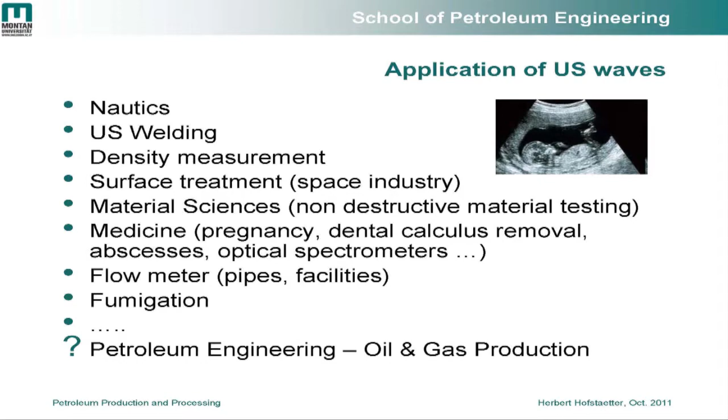But generally speaking, what is the application of ultrasonic waves nowadays in order to improve oil and gas production? What can we do in order to get more out of the ground in a more effective way, and in a more cost-effective way too?

Let me start with a few definitions and basics on ultrasonic waves we need to understand before we go into the details of worldwide applications. If we're talking about ultrasonic waves, we mean all those waves above 16,000 hertz, so a human being cannot hear this sort of wave. I'm not saying that nature doesn't hear more than 16,000 hertz.

We also need to understand, if we want to transport ultrasonic waves, we need incompressible media. For instance, in a gaseous atmosphere, we wouldn't be able to transport these ultrasonic waves over a long distance. So we need a liquid environment, since liquids, for instance water, are almost incompressible. I'm not saying water is not compressible at all—this is not true, water is compressible, and this has a significant impact in reservoir engineering. But for our application, we can assume, and we can live with this assumption, that water is a sort of incompressible.

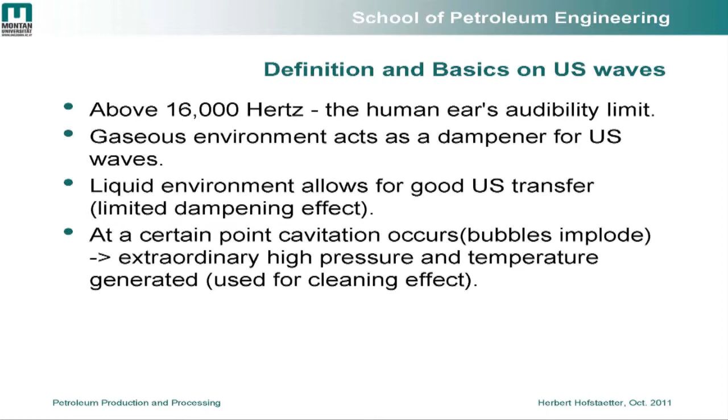Most important for this phenomenon is that we have to understand that at a certain point cavitation occurs. This means if we intensively apply ultrasonic waves, we generate some bubbles which may implode, and therefore extraordinary high pressure and temperature is generated at that time. This phenomenon is basically used in our industry to apply ultrasonic waves in an effective way.

Now, what do we mean by cavitation, which is the driving motor for the ultrasonic wave application? We mean by cavitation the formation and immediate implosion of cavities in a liquid. This means we are forming small bubbles, they implode and then finally generate excessive energy, which is useful in our business. It usually occurs when a liquid is subjected to rapid changes of pressure that cause the formation of cavities where the pressure is relatively low.

In other words, there is an application given in every borehole worldwide, whatever the depth of the borehole is, and this phenomenon we need to apply at a later stage—we will see what the benefit out of that is. The cavitation bubbles implode with force that can be generated which is 1,000 times higher than the primary force exerted by the ultrasonic field and emitted into the media.

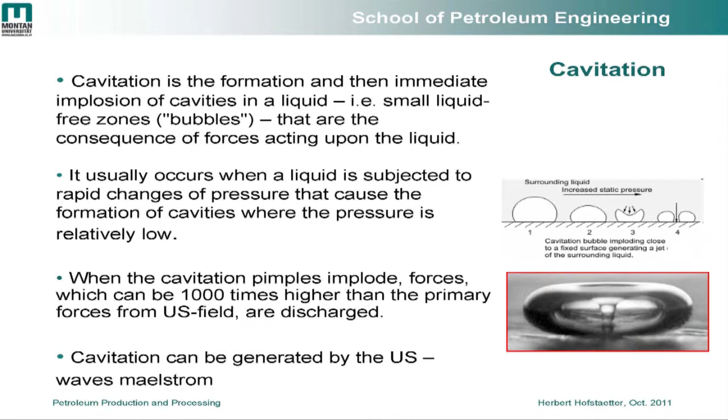On the right hand side, we see the formation of this bubble, right at the stage of implosion, just before it's going to implode. Most important for us is that we need to generate the cavitation, which is generated or might be generated by ultrasonic waves—a maelstrom—and that's what we're going to use. The focus is that we apply just limited energy by the ultrasonic field, and we generate 1,000 times larger force, which we can then use for different types of purposes.

The question that arises now is how to generate basically ultrasonic waves.

To dissipate electromechanical oscillation, a force is usually required which originates from the so-called reverse piezoelectric effect. What is the piezoelectric effect all about? Reducing it to the basics, all we are doing is forcing crystals in order to generate electricity. If we are forcing crystals at the surface and the platelets together, then we can generate electricity, but this effect can be reversed too.

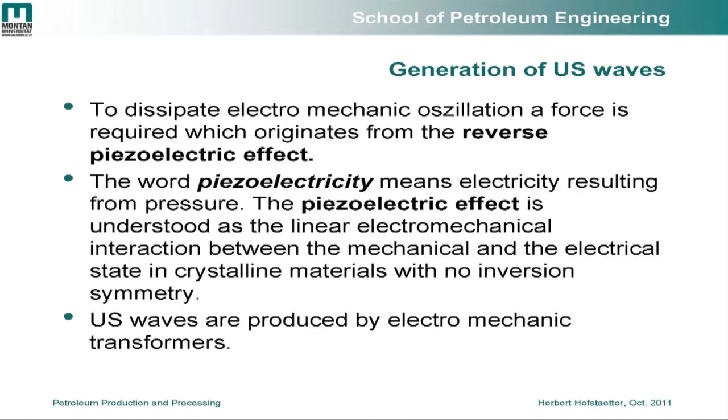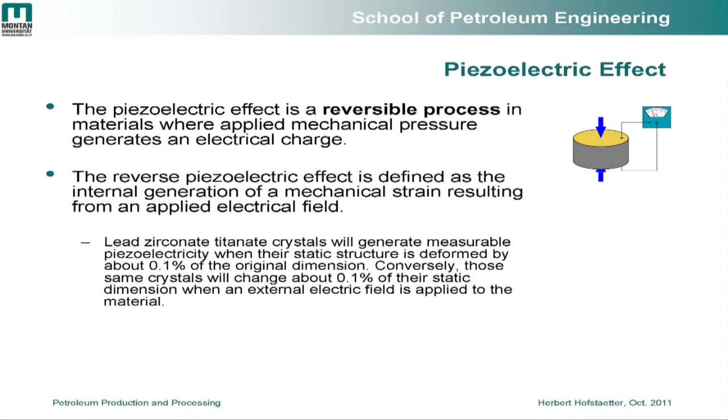This means if we apply electricity to the quartzite, for instance, then we can generate forces, so it's reversible as often as you want. The piezoelectric effect is not new at all, well known for many decades. It's most important that this process is reversible in materials where we apply mechanical pressure, shown here on the right-hand side. If we apply force at this sample of quartzite, electricity is produced, and the other way around, if we apply electricity, we are able to make this quartzite move at a certain frequency. This is the phenomenon we use in the industry.

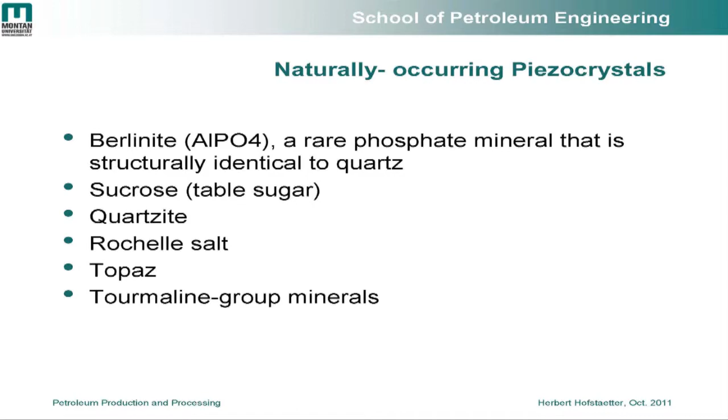How to use now these crystals? There are several ways well known throughout the entire industry. There are naturally occurring piezo crystals, and the most famous one is quartzite, well known because of its excellent and outstanding properties, showing up at whatever temperature or pressure might be in the surrounding environment. There are several other types of crystals known in the industry. Some rare elements are involved, and most are expensive too, which is why quartzite actually has the most application worldwide. But besides the naturally occurring crystals, we also know man-made piezo crystals and ceramics, a special type of crystal.

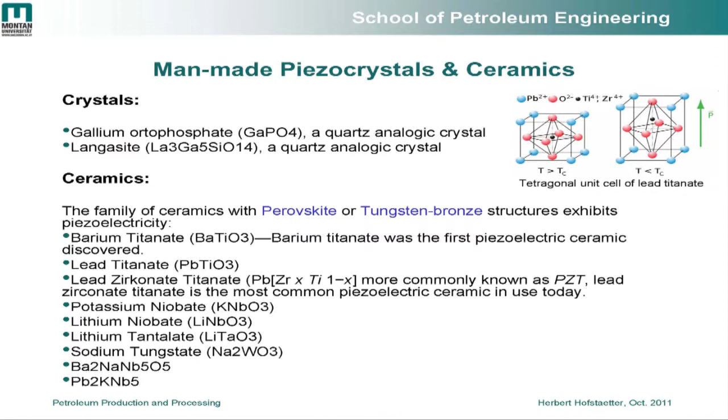We see here these different types, and I'm not going to plague you now with all these chemical formulas and different types of crystals and ceramic types. Anyway, they are most important nowadays because they have unique behavior. They show up with unique behavior, and are sometimes way better than the conventional natural quartzite, as we discussed before.

Some of the crystals also contain lead, and lead is questionable nowadays because of well-known environmental reasons. So the industry actually shows a strong tendency to keep off from this lead-containing piezo ceramics and switch over to other alternatives. Alternatives are given, they are already in place. Being very honest, some of these solutions are more expensive than the conventional lead piezo ceramics, but it is high priority nowadays to apply this new technology in our industry.

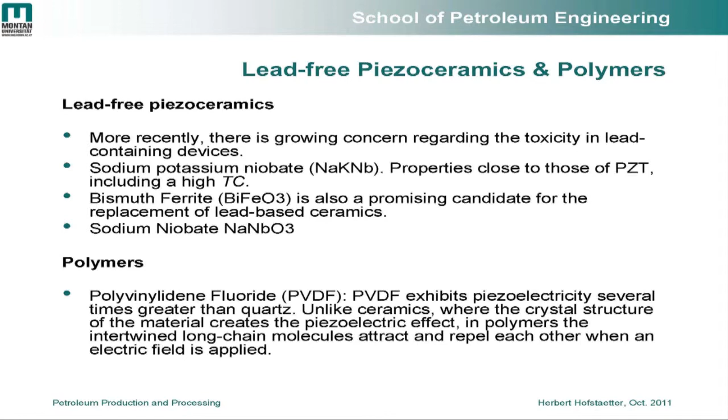Finally, we also know that polymers are ideal to show this piezo effect. But even though we are at a much earlier stage of our research here, we know there is an application, but there is still room left for further research into what's to be done in the future. I'm seeing lots of young people around here, and this will be maybe your future, to work on this subject and find out what's best of all for the solutions in our industry.

Now let me step further. What are the key issues in our oil and gas business, and where can we finally apply these ultrasonic waves and make use of this phenomenon?

One of them is the degassing effect by ultrasonic waves. We all know, just think about a bottle of Coke, or a bottle of beer if you want, that gases are soluble in liquids. Gases are soluble in water, and gases are soluble in hydrocarbons, in oil for instance. Depending on the pressure and temperature boundary conditions, we can dissolve more or less. The higher the pressure, usually the higher the solubility. The higher the temperature, generally the lower the solubility. This applies for oil as well as for gas.

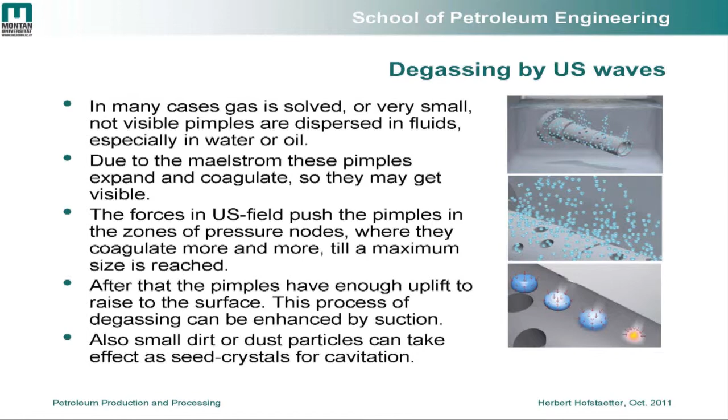Now back to the Coke sample. Put a bottle of Coke in the sunshine and open it, and you are going to have a hard time. If you take the bottle of Coke out from the fridge and open it, then nothing is going to happen, or almost nothing.

The point is that solubility for gas decreases with higher temperature. This is the reason why you run into trouble if you open a bottle that's been in the sunshine, but you don't have a problem at all if you take it out of a low temperature environment.

In the oil industry, we make use of that, and we need to get these gas bubbles out of oil, even at low temperatures. This means we don't need to apply extra energy to increase the temperature level.

We also can get the gas out of liquid media, from liquids at lower temperature, by the application of sonic waves. Even though the bubbles are not visible at first since they are finely dispersed in the fluids, water or oil, if we use the effect of the maelstrom, these bubbles expand and coagulate into larger ones. Finally they implode, as discussed before, and can be recovered from the liquid phase. A very non-tricky operation, low-cost, at a low energy level, so highly attractive for our industry.

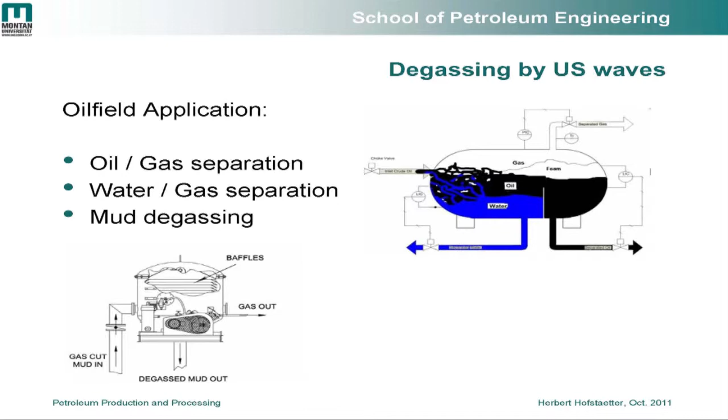What engineers and operators do at the surface is remove the gas from the drilling fluid, from the drilling mud. This is rather tricky since drilling fluids have their own parameters which don't always allow removing gas at any pressure and temperature condition. Again, there is an application for ultrasonic waves to get the gas out of the liquids at a low energy level.

Another problem in our industry is that crude oil in many areas of the world comes along with paraffins and asphaltenes. These have a strong tendency to be deposited in the pipes, and because of this deposition, the inside diameter of the pipes is reduced.

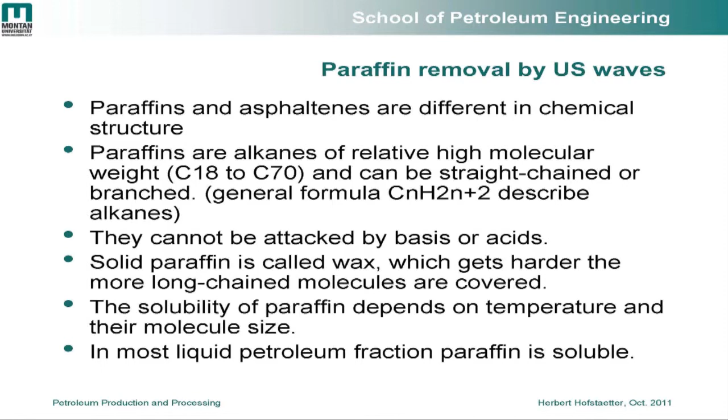So we create a so-called flow restriction, hindering the natural flow all the way from downhole back to the surface. This means lower production, which is definitely unwanted in our operation. We want to produce as much as we can, being very honest with you. But precipitation of paraffin and asphaltene hinders this process.

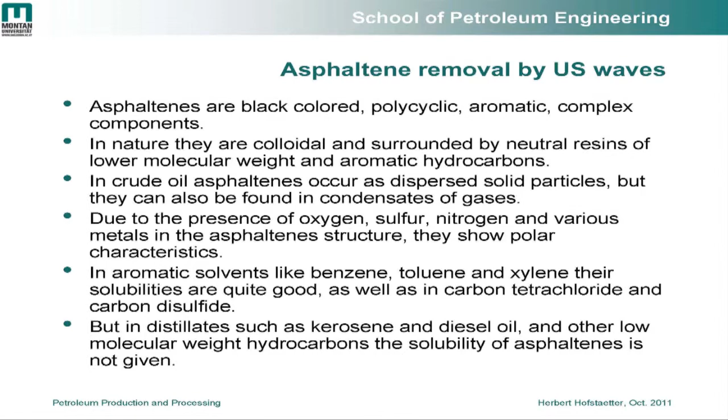We know we might remove paraffins and asphaltenes chemically, but you first have to get access to this sort of deposition. There's no use of chemicals required in this particular case, and we have demonstrated in the lab and in the field that the application of sonic waves can reduce the precipitation of paraffins and asphaltenes.

How does the removal process happen? Now, if this is our emitter, our ultrasonic emitter, we are sending waves directly into the reservoir.

So we are lowering our ultrasonic tool downhole directly into the borehole, and at a certain point we stop, and then we start to emit this 30,000 hertz frequency into the reservoir rock.

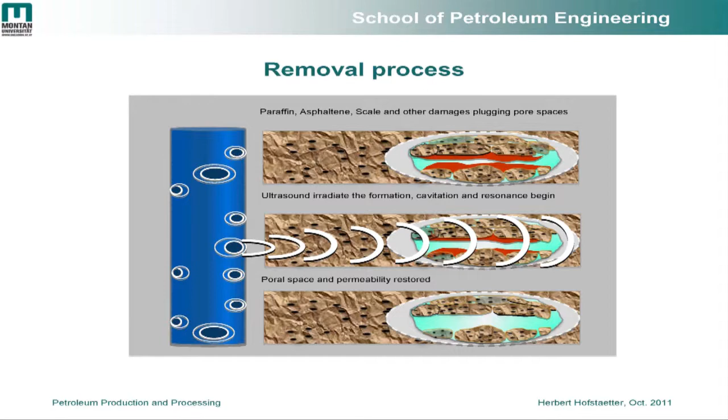If we enlarge this part of our reservoir sample, we see the deposition here at that point, which hinders the flow of oil and gas. It could be debris or something else. Emitting these ultrasonic waves finally cleans these pore throats, these tiny pore channels, allowing more inflow into the wellbore. More inflow into the wellbore means higher production, higher productivity of the entire process.

What are the problems with wax precipitation? I already mentioned that the inside diameter is reduced. This is a field sample I brought for you here, and you can see that at the end of the day, finally, the entire volume of the diameter is plugged, and there is no more room left for any flow.

So these pipes are definitely fully plugged. This ends up, first of all, in a lower production rate, and finally in no more income, which is not what we want to achieve in our business. Because of these precipitations, we also get higher friction, which means we need more energy to produce the fluid. This means more energy consumption, higher costs overall. And finally, the surface facilities get plugged, and the pipelines too.

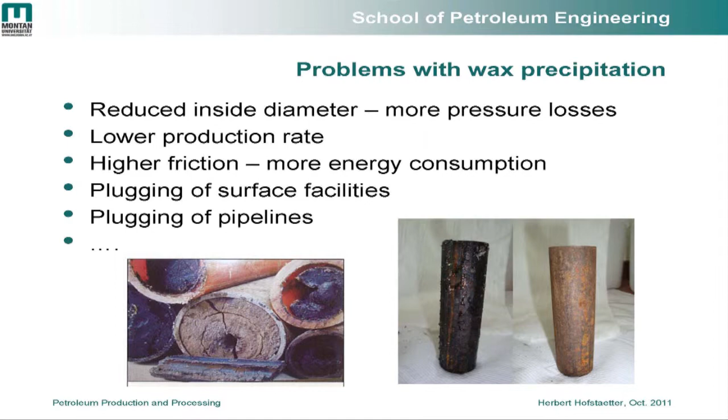On the right-hand side, I brought a sample for you, what we did in the lab. Here on this left-hand side, we have a piece of a sucker rod string, which we need to pump the oil out of the ground. This one is fully adhering and contaminated by paraffins. After treating this sample in the lab with ultrasonic waves, we finally came up with the blank surface of the sucker rod item we tested.

Here is the impact of the pressure losses by wax deposition. On the vertical axis, the y-axis, I'm showing the depth in thousands of feet, and here on the x-axis, I show the pressure loss in 100 psi. I start on the right-hand side with a 1-inch diameter of a tubing size, and on the left-hand side we get 3 inches of a tubing size.

Now let's assume we are starting to produce a new well, and we have the full diameter of 3 inches, so we start here at that point with this sort of pressure loss. Let's assume this is something like 1100 psi we are going to lose on the way up back to the surface in a depth of something like 10,000 feet, 3,000 meters or so.

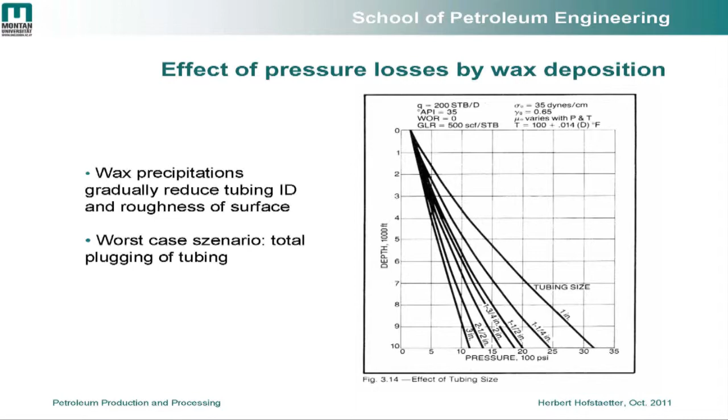If now the tubing is gradually reduced in its inside diameter because of these precipitations of paraffins and asphaltenes, we end up at a smaller inside diameter of 1 inch only, and see how much the pressure loss is now. It's more than 3,000 psi, threefold as much as in the clean tubing.

This means we are losing a hell of pressure on the way up to the surface. Way more energy is consumed, and maybe the wellbore is not free-flowing at all, so we have to implement artificial lift systems. As I mentioned before, the worst case scenario could be that the inside diameter is so small that it's fully plugged and even no flow is going to happen. This is a nightmare for every operator.

Just before I left from Europe to Brazil, I talked to my colleagues in the North Sea. They are in the situation now, in a giant oil field actually, having the problem of these precipitations. It's a shell-operated field, and they are having no production at all from some wellbores because of exactly this phenomenon.

How was our setup in the lab at our university? As mentioned before, I'm cooperating with this Swiss company, Progress Ultrasonics, and they have supplied all these test devices. You see here the source for the ultrasonic generator, and we are emitting via this type of sonotrode, vertically downhole into this chamber.

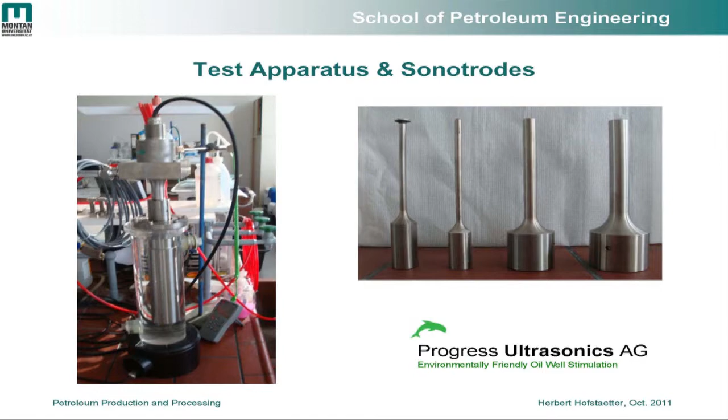The trick thereby is that we have to identify the correct frequency, the correct wavelength, and how to emit optimally onto the object we want to get our hands on. Another trick is the construction, the geometry of the sonotrodes, and which material we implement. These are conventional high alloy steel sonotrodes, but in the future we are going to use ceramic sonotrodes as well. I'm working with my colleagues from the Institute of Ceramics on this new type of sonotrode for the next generation.

This is a vertical inflow performance presentation showing how we can improve the productivity of our wellbore. You see the productivity of the wellbore on the x-axis, and we see the pressure on the ordinate. The green line represents the inflow performance, meaning the lower the wellbore flowing pressure, the higher the productivity.

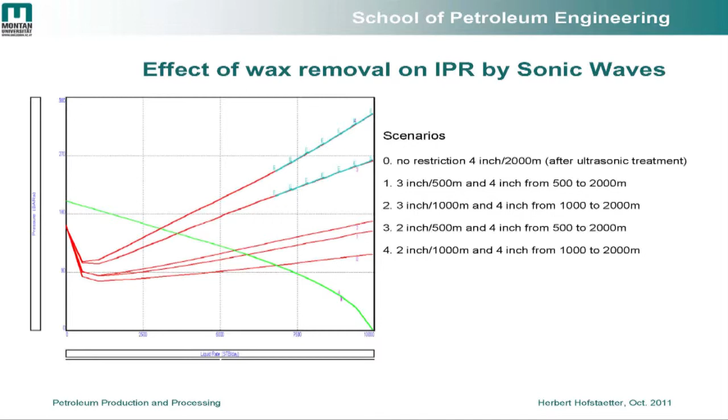This is now the simulation of the large diameter without any precipitation, and this would be the representative line with precipitations and with restricted inside diameters. You see how much productivity we lose if we reduce the inside diameter. So there is a substantial impact on our overall productivity of the wellbores, predominantly on oil production.

I emphasize predominantly on oil production because we also know some gases or higher hydrocarbons which come along with paraffin and asphaltenes, causing the same problem. What are the reasons for other precipitations? We are also talking about precipitations of calcium carbonate, and this hurts in exactly the same way. They're even worse, because we are having precipitations which are not soluble. Calcium carbonate can be removed by applying hydrochloric acid, but barium and strontium sulfate precipitations cannot be dissolved chemically. They have to be removed in another way.

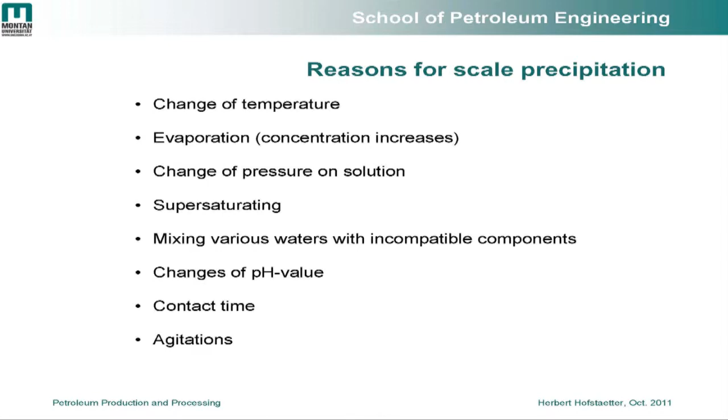One of the reasons might be the change of temperature. Pressure and temperature change on a regular basis during the lifetime of a field, so we cannot change this. We have to live with that.

Another famous point is supersaturation, oversaturated media, which finally leads to the precipitation of salts. Another important point is the contact time. This means the more we are producing, the longer the time elapsed in our production period, the higher the chance of precipitations.

Now, what are further problems with scaling? It is not only the reduction of the inside diameter of our tubing string, it is also the problem that precipitations in the near wellbore zone are well known to cause further pressure drops. The higher the pressure loss in the near wellbore zone, the lower the production rate will be. We call this the so-called skin factor, and we can to a certain extent remove the skin factor by applying acids to dissolve these precipitations, but this is not generally given.

One of these options would be an interference between the application of ultrasonic waves and hydrochloric acid, HCl, for instance. We don't know at the moment, and we have to be honest to ourselves - we have to go for further research. We don't know at the moment how deep our entrance could be into the wellbore, how high the energy must be, or what the optimum energy of our ultrasonic waves must be in order to get an optimum of this stimulation.

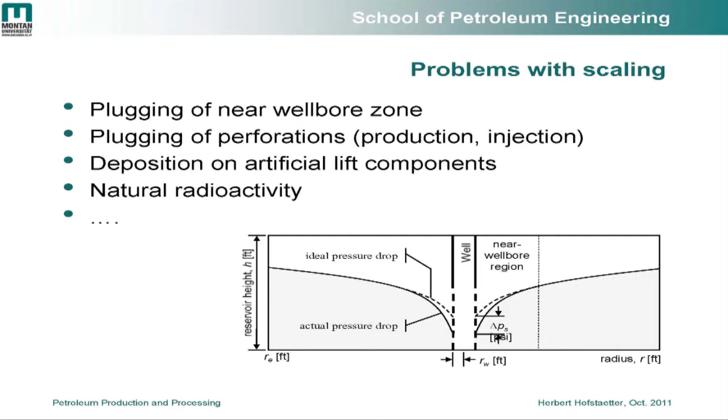Another problem that might come along with the precipitations is natural radioactivity. We know that some of our rocks in the industry own a certain amount of radioactivity, which is not a problem at all. But if over the years of production there is an accumulation of these precipitations, it might be very likely that we exceed the maximum allowed amount of radioactivity, since radioactivity has accumulated. Then we are running into serious trouble.

I mentioned before that we have carried out numerous lab tests over the last years. But based upon the results of these lab tests, we have also carried out field tests in the meantime, and we started in the Gulf of Mexico, where we substantially could increase the productivity.

In this particular case, we could increase the productivity from 49 to 235 barrels per day. In another case, we increased the production rate from almost 900 to 1900 barrels per day, just by applying sonic waves in order to stimulate the wellbore.

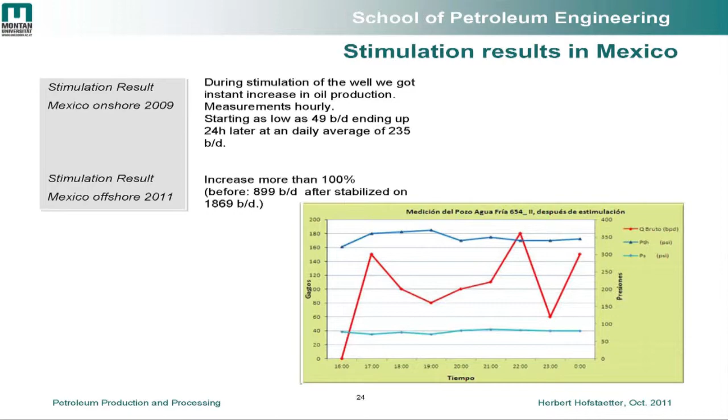The last results we got just a few days before from Pemex, the partner in Mexico, show that the last stimulation we carried out was 6 months ago, and we increased the productivity from 1400 barrels per day up to 2400 barrels per day. The net income the partner finally made over this period of time is something like $14 million, which is quite substantial.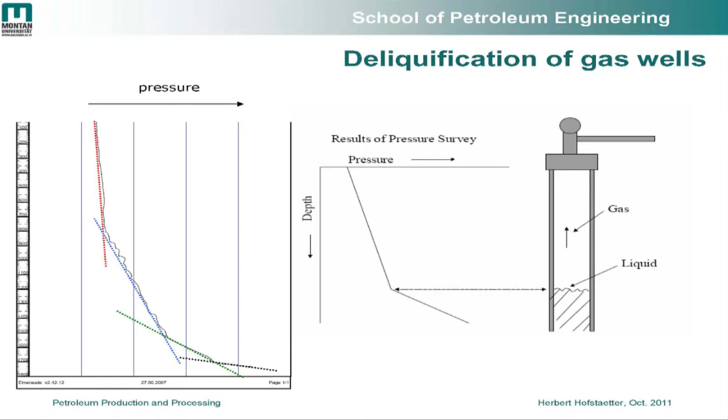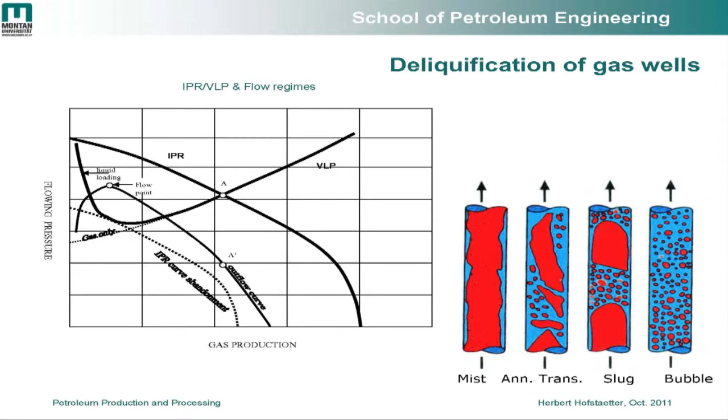Another application could be the deliquification of gas wells. This means if we are producing gas from our reservoirs, we are not only producing gas, but gas usually comes along with a certain amount of liquids. If these liquids accumulate at the very end of the wellbore and are not carried away by the natural gas flow produced out of the hole, then the wellbore might die and there is no more production left. So all we are doing is trying to use the effect of the ultrasonic waves, as discussed before, to create fine, tiny bubbles and accelerate the flow of the gas stream back to the surface.

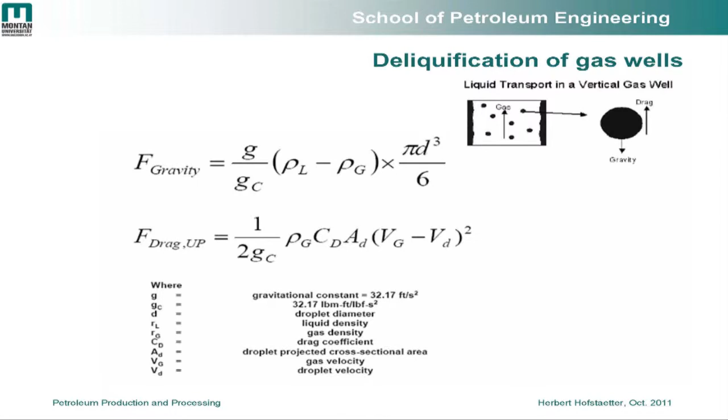All we need to achieve is, because of the so-called Turner effect, a flow of this gas which is higher than the forces acting downwards on the liquid droplet. This is the natural gravity acting on the droplet, and this is the drag force of the flow on the droplet. This drag force must be higher than the gravity force downwards, and then the liquids are transported back to the surface.

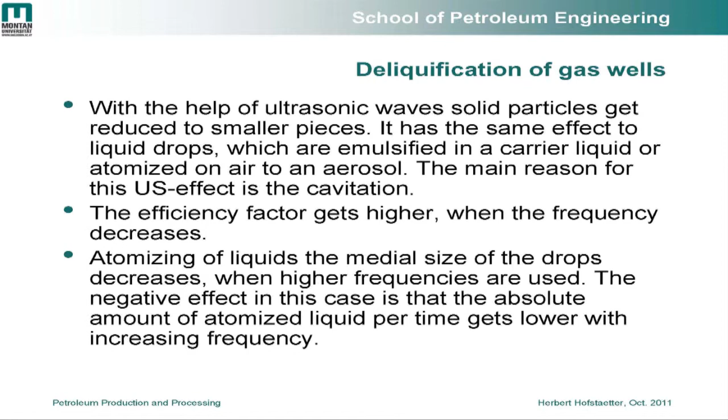So if we can manage to deliquify our gas wells, this means in the long term we get a higher production rate, and at the end of the day also a higher recovery factor. This means we can get out of the wellbore more than we ever could with previous technologies, but with the permanent application of ultrasonic waves we can even increase the recovery factor.

We are all aware in our business that if we are talking about oil production, we have to live with the phenomenon that we are also producing water. There must be found a solution for what to do with the water. We cannot spill it, so we have to find a solution, and the only answer is to re-inject the water into the reservoir at another point via an injector where the water comes from.

But the point that comes along with this is rather tricky too. We are having impurities in the water. In other words, we need to clean this re-injected water before we re-inject it, because otherwise we are creating further problems. One of these problems could be that we are injecting bacteria, which might generate H2S, sour gas, in the future. But our equipment is not designed to handle sour gas, and corrosion coming along with H2S is well known.

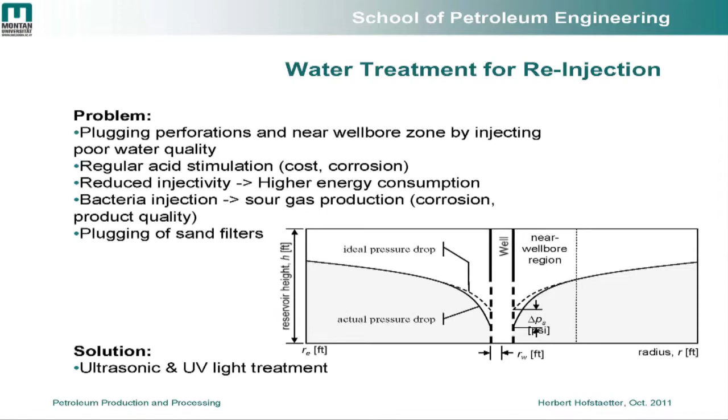But the application of ultrasonic waves and ultraviolet light in combination has demonstrated that this could be a solution to clean the water up to a quality comparable to drinking water. We have this technology almost stolen, so to say, from the militaries, who have already demonstrated that they can transfer so-called black water, the water from the sewage system, into drinking water. Exactly this technology is based on ultrasonic waves in combination with ultraviolet light.

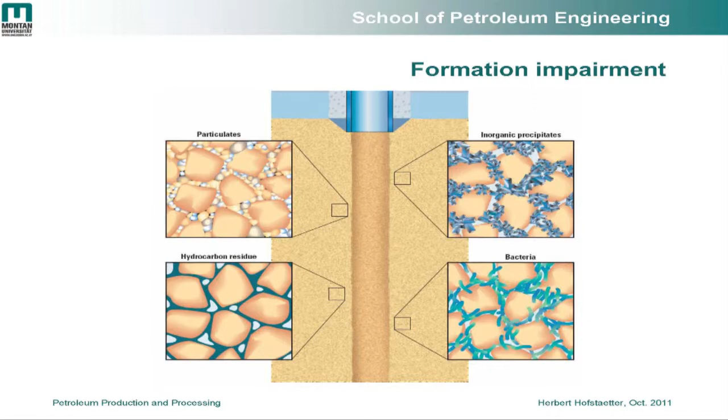Another problem could be the creation or natural occurrence of bacteria downhole, and there's another application to get rid of this bacteria problem and to kill and remove these bacteria by the application of sonic waves too.

You may have heard of unconventional gas resources, and you may have heard what gas hydrates are all about. Hydrates are huge resources worldwide, unknown actually in terms of their size. But the industry has demonstrated that there are huge unconventional energy resources on the ground of the sea and in the permafrost area too.

But hydrates are also well known to be formed in our production system. This means little ice crystals get formed and deposited in the system. Again, the same effect as with paraffins and asphaltenes—they plug our system.

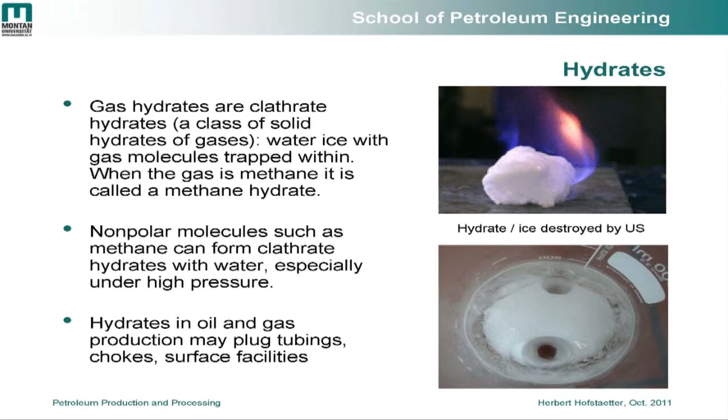We successfully demonstrated that we can destroy ice, as shown here in the lab, by the application of sonic waves. Our goal, though we haven't applied this in the field so far, is to even prevent the formation of ice crystals. The theory is: if we can destroy existing ice or hydrates, then by permanently applying ultrasonic waves we can also manage to prevent the precipitation of ice crystals and the plugging of the system.

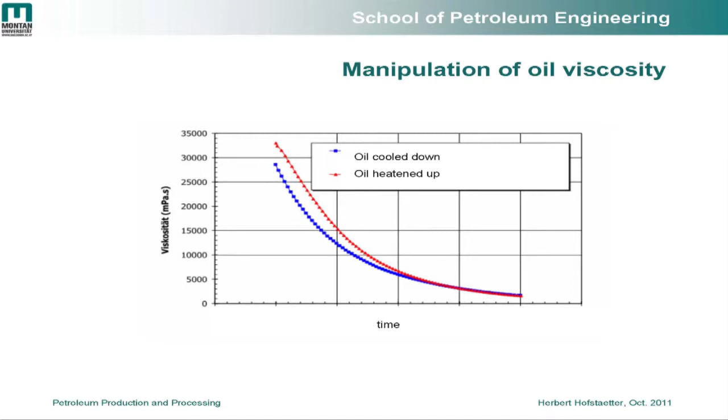What does that mean? Viscosity is actually the hindering factor in the natural flow of our reservoirs. The higher the viscosity, the more energy we lose, the more friction between the fluid and the wall of the tubing, and the lower the productivity. The other way around—if we can reduce the viscosity of these fluids, we can increase the productivity of these wellbores to a great extent.

Our final goal is to apply the sonic waves in the entire reservoir. Because if we can apply the sonic waves in the entire reservoir and at the same time reduce the viscosity in the reservoir, this means we will increase the mobility of oil from the reservoir. And increasing the mobility of the oil finally means we can increase the recovery factor, so we can get out more oil from the reservoir than we ever did before with conventional technologies.

What we are doing in the field, and what we have done and are doing right now, is carrying out a few jobs in the Gulf of Mexico again. We are lowering the sonic tools down to the zone of interest, maybe to the perforations, and emitting the ultrasonic waves to stimulate the wellbore.

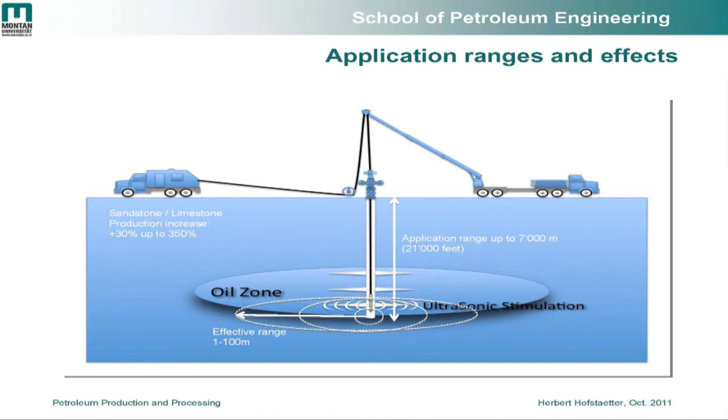How is the system set up? We need a generator, of course, an ultrasonic generator, and then we transfer the electricity down to the resonator at that point. Depending on the setup, we can generate different wavelengths, different frequencies, and different intensity. We are limited in terms of intensity in the lab, otherwise we'd blow out our lab facilities, and that's definitely not what we want to achieve.

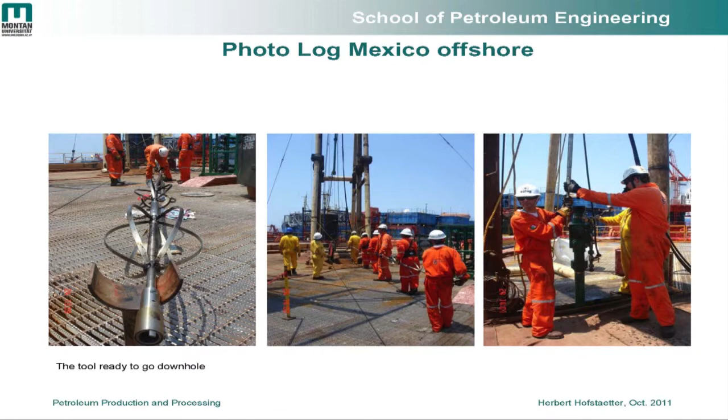We know that in artificial lift we have serious problems with various types of artificial lift systems due to precipitations, especially on electrical submersible pumps. Because of the high rotational speed of the pumps, there is always precipitation on these various components. Applying ultrasonic waves permanently means we can avoid these precipitations, and the mean time between failure, or the lifetime of the pump, could be extended to a non-defined day from today's point of view.

We also are going for cleaning the so-called gravel packs. Gravel packs are devices installed down in a borehole in order to prevent sand production. Some reservoirs have a strong tendency to produce sand, and this sand erodes the system and eventually plugs the wellbores too. But if the wellbore is plugged once, there is no more production. With the stimulation of these gravel packs, which we are going to carry out in a few weeks, we are improving the productivity again.

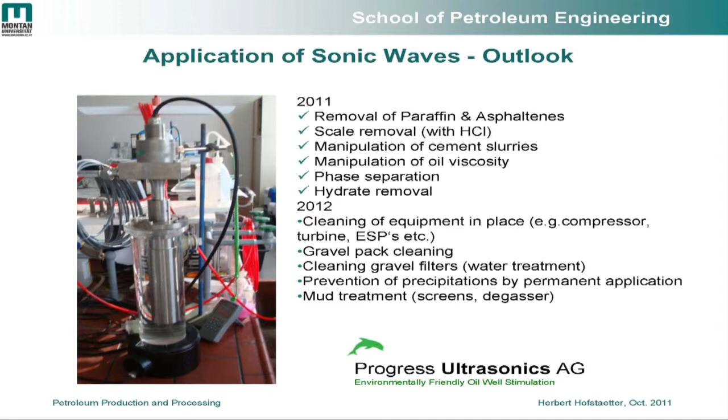And finally, skipping some points now, we want to get our focus in drilling as well, on the mud treatment too—the treatment of drilling fluids in order to separate these various phases. Ladies and gentlemen, thank you very much for your attention.